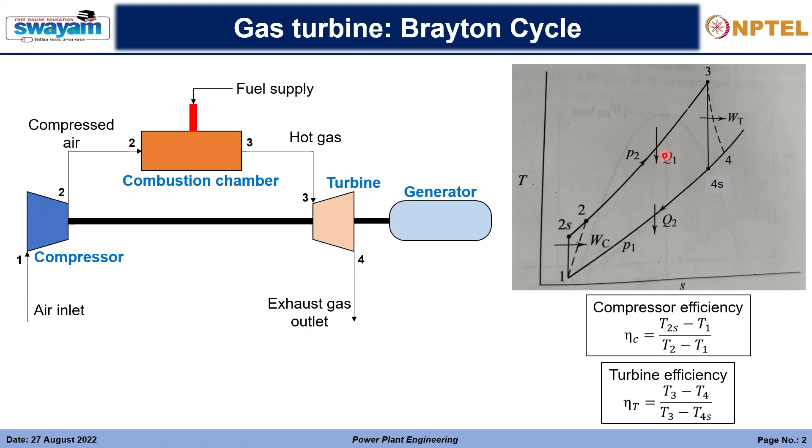First, since the process here is adiabatic, we will have to consider the temperature and pressure relations. T3 divided by T4s is an isentropic, reversible adiabatic process, and T2s and T1 is also isentropic. These are related by the equation P2 by P1 to the power gamma minus 1 by gamma, where Rp is the pressure ratio, the highest pressure by lowest pressure.

Then the work done is basically external work, given by this equation, which you might have read about in thermodynamics courses.

Then I wish to talk about how we are getting this work done. One of the most interesting things here is that PV can be converted into MRT, T1 minus T2, giving us a particular relation: gamma R divided by gamma minus 1, which basically represents the specific heat capacity at constant pressure, Cp. Although this formula is generally applied in 1 to 2 or 3 to 4, these are not constant pressure processes, but yet we get a term like this, so we can use this Cp term at the inlet conditions to calculate the work done in each case. Normally we cannot use it since pressure changes and Cp changes with pressure, but since we are getting a term Cp while deriving, we will consider it.

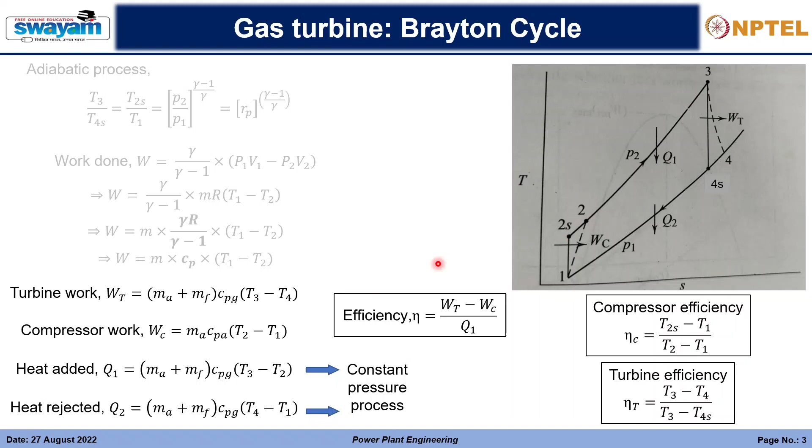So this was about the process and analysis of the Brayton cycle. Now let us solve one problem. This problem I have taken from the book Power Plant Engineering by P.K. Nag, and this problem actually talks about intercooling.

Now what exactly is intercooling? Also regeneration - I will briefly tell you about this. So intercooling means there are two compressors. There can be 2, 3, 4 compressors also.

Between each compressor, the temperature of the outlet of the compressor is cooled down to this lower temperature. Although the pressure is rising at the compressor, with pressure the temperature is also rising. So the temperature is then cooled down at the same pressure. Again, this next compressor rises the pressure from a lower temperature to that particular temperature.

So you can see from this TS graph, it will be better here. From 1, the inlet to compressor 1, 1 to 2 it is going, and then it is being cooled down from 2 to 3 in a constant pressure process. Then it again enters compressor 2 at point 3, after cooling. Then the pressure is risen again, but you can see the temperature rise is almost constant. For perfect intercooling, these temperatures - 2s and 4s, and 4 and 2 - will be almost constant, exactly constant.

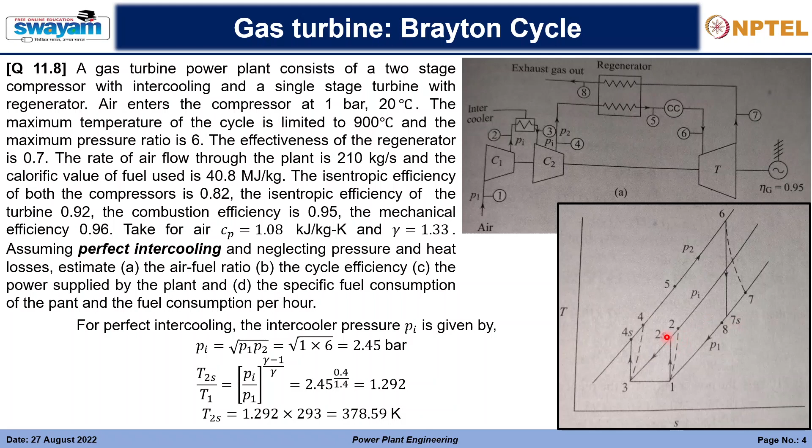But since it is not isentropic, we'll have to consider the efficiency of the compressor. The efficiency of compressor is defined as T2s minus T1 divided by T2 minus T1 — this was the least amount of work that was supplied to the compressor, but instead it is taking a higher amount of work, T2 minus T1. That is how the efficiency is defined, and utilizing this formula we will get the temperature value of T2 as 397.38.

So T2 we have found out, but since it is perfect intercooling, T2 and the compressor efficiencies are constant, so the same will apply down here also, and we will find that T2 and T4 will be constant.

It is almost constant, you can see here also. I just want to explain, I have shown here also. So for P2 and P1, I have considered the same thing.

T4s I have got as 378.74, and utilizing the compressor efficiency I have got 397.32 Kelvin. So it is almost close, that can be considered almost equal, right? So T2 and T4 are almost equal.

Then we have got T2, T4, okay. Then we will calculate T6, which we know, and T7 we need to know. So T6 to T7, this is an adiabatic process.

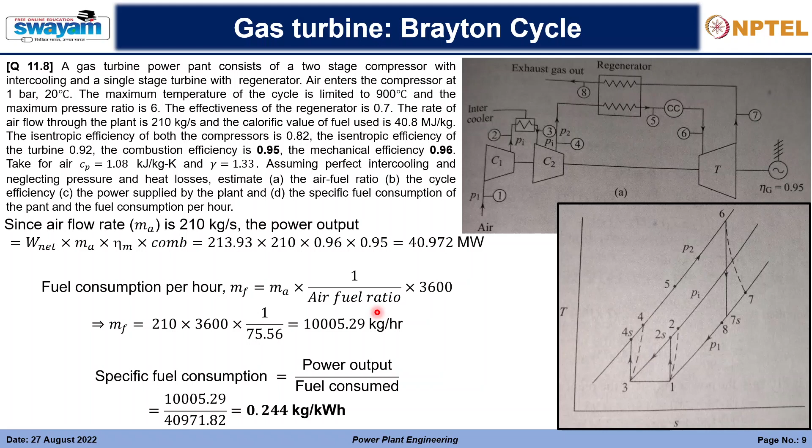Now as the next topic, I want to talk about the Pelton wheel. So let us quickly move on, we do not have much time.

So this is how the Pelton wheel looks, and it is a tangential flow hydroelectric turbine. Hydroelectric means there is no steam impinging upon the turbine blades, but rather it is water having very high kinetic energy that is impinged upon the turbine blades like this.

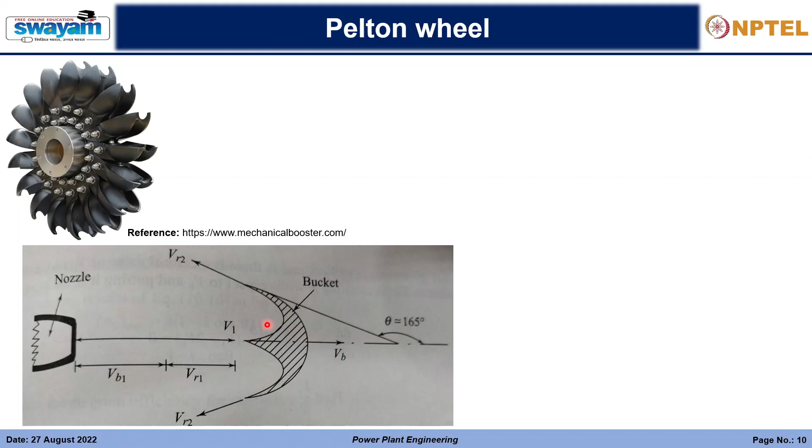These are the blades you can see, and they have this particular shape. There is a section dividing the two sides, and there is a particular reason for this division: it splits the jet. The jet directly impinges upon the center and splits in both directions.

By splitting the jet, a symmetric velocity diagram is created from both sides - the velocity here and the velocity coming out there will be the same. This cancels out the axial velocity, meaning the velocity of the jet in the upward direction and again in the bottom direction will be equal and opposite, so it cancels out the axial velocity components.

Now, if I supply this jet in the tangential direction, the water will move out in this direction and in this direction, along this shaft, this longitudinal direction. So if there is any velocity component in the shaft's longitudinal direction, it will impart a particular thrust on the shaft.

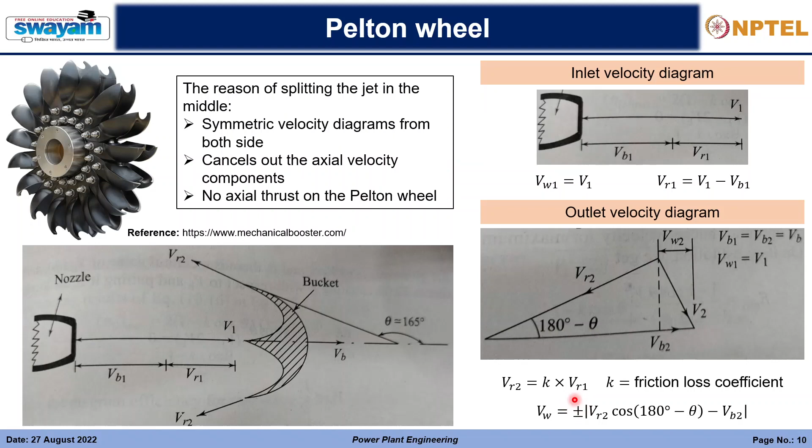Moving forward, if we calculate the total work done on the wheel, how can we calculate it? By calculating the change in momentum. This change in momentum is m, but m is not in kg, it is kg per second. So change in momentum with respect to time, that is the work done.

This is m times v1 minus [k vr1 cos(180 minus theta) minus vb]. Since the blade's whirl component here is directed, suppose we assume it is directed in the opposite direction of v1, we'll have to put a minus sign, so the total effect will be positive, and this is the total work done here.

Then the hydraulic efficiency can be calculated in this manner. Somewhere I'm missing a vb here. This is the force, and the work done is the whole thing multiplied by the blade velocity. Force into velocity gives us power, force into distance divided by time. So we'll multiply this whole expression with the blade velocity, and that will give us the work done on the wheel. The work done divided by the kinetic energy, which is half m v1 squared, the kinetic energy of the inlet jet, will give us the hydraulic efficiency.

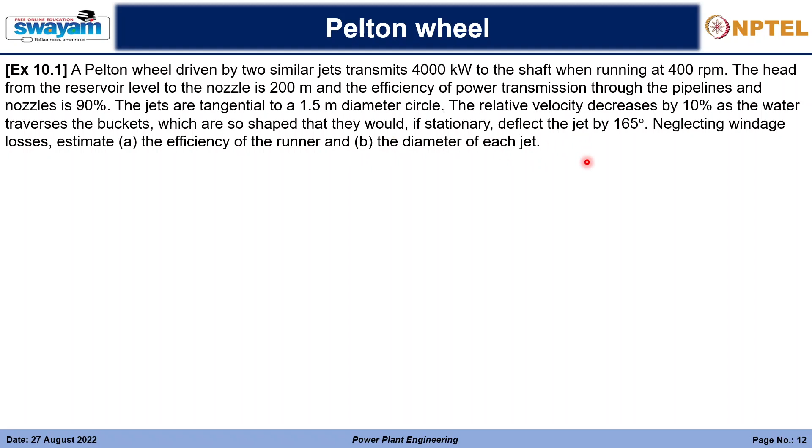So first of all, what we can do mechanically is calculate, from the head that is given, the velocity of the fluid at the inlet to the bucket. So normally in the formula you will see this is 2gh.

Theoretically, if I equate kinetic energy to potential energy, it gives us the velocity at the outlet to be root 2gh, and somewhere you can see the velocity of the jet leaving the nozzle is being multiplied by cv outside the square root, meaning cv applied to the theoretical value. But now I am multiplying it inside the square root sign.

Why am I doing this? Because the total head that I am receiving, that is the mgh potential head, is not being completely utilized — there are some losses. So the amount of power transmitted is only 90%. 10% is being lost on the head itself, not the velocity coming out of the nozzle — only on the head it is 10% loss. So I will have to deduct the loss inside the square root here.

So this is how the velocity of fluid at inlet to the bucket is calculated. We have no loss at the nozzle, rather we have loss at the transmission, so that is why we calculate like this. Then the velocity of blades — the RPM is given, the diameter of the wheel is given, so accordingly we can calculate the velocity of the blades.

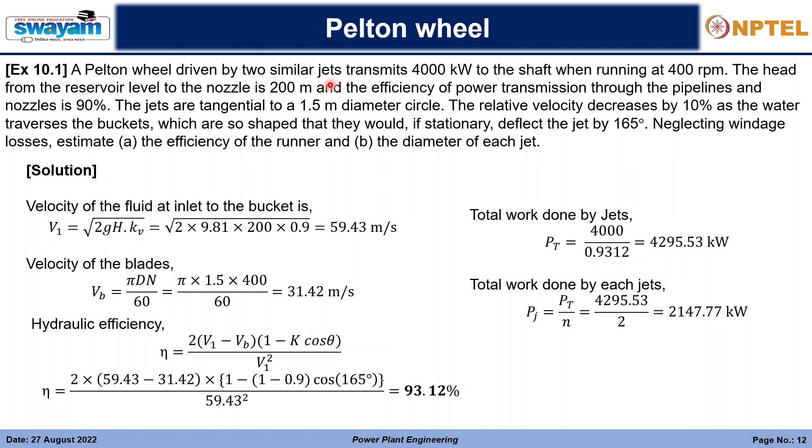Since we have two jets — two similar jets driving the wheel — we divide the whole power by 2, and that gives each jet a kinetic energy of this much power.

Then we do an energy balance such that from each jet's kinetic energy, we can calculate by this formula the velocity of the jet leaving the nozzle. If the velocity is known, we can calculate the diameter of the nozzle required. By this we get the diameter of the nozzle as 0.1614 meter. So this is how the energy balance is done, and from this we calculate the diameter.

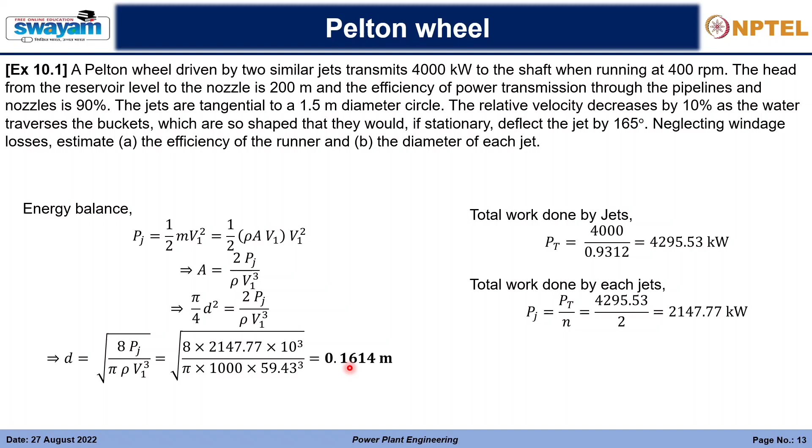Let us now work on a similar problem, which specifically illustrates the designing of the Pelton wheel.

We have some targets to reach: power to be developed is 6000 kilowatt, net head available is 300, RPM needed is 550, ratio of jet diameter to wheel diameter is 0.1, hydraulic efficiency is 0.85, and coefficient of velocity speed ratio are given.

So if we know all these quantities, can we determine all these parameters that are further needed? Can we design the Pelton wheel? Let us see.

First we need the velocities. We have the head, and from the head we can get the final exiting velocity from the nozzle. We have the velocity coefficient, since in the nozzle there will be some losses, and according to the losses you multiply a factor to the theoretical value. So that is 0.98 times the theoretical value, giving 75.19 meter per second. This is the inlet velocity from the nozzle.

Then the blade velocity is given by the speed ratio times v1, which gives 35.29 meter per second. If we know all these values, we can directly calculate the quantity of water required.

We know the overall efficiency. Since there are no transmission losses anywhere, we can directly consider this. The overall efficiency is 0.85, given by this formula. This leaves only one unknown, the discharge rate, and it evaluates to 2.4 meter cube per second. So this way we can calculate the quantity of water required.

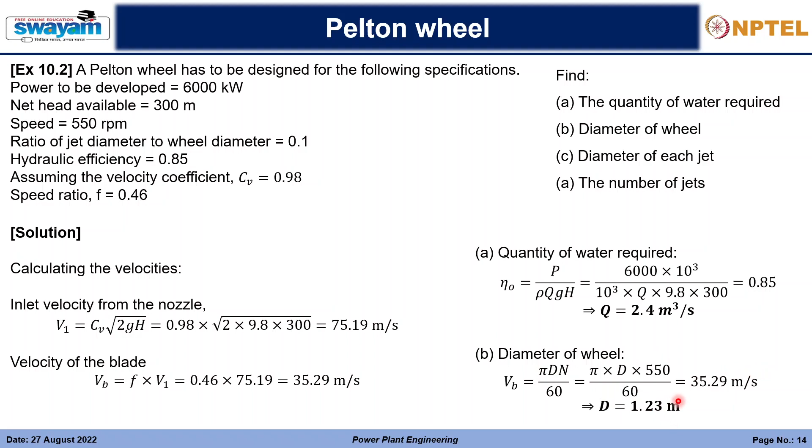Next, diameter of each jet. We are given the jet diameter to wheel diameter ratio. Now that we know the wheel diameter, the jet diameter will be 0.1 of that, which is 0.123 meter.

Next, number of jets. The total quantity of water required, Q, evaluated to 2.4, we divide by the amount of water supplied from each jet. By that we find we need at least 3 jets to supply this amount of water. This is how we can design a Pelton wheel and its various parameters.

This is how we can control the amount of power to be developed. So this was a question regarding that.

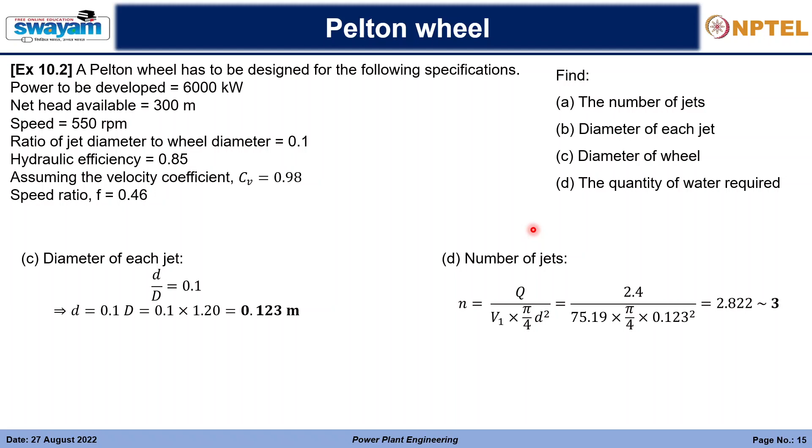Now I want to discuss a very important thing, that is specific speed. Specific speed is basically defined as the speed of a geometrically similar turbine which produces 1 kilowatt power under 1 meter head. Suppose we have a very big turbine with a very big head.

We cannot directly experiment on that, right? We can experiment on a smaller scale, so we have to scale down the whole thing. Geometrically everything is the same, but we scale down in order to analyze it. We cannot directly go and do experiments on very big actual turbines and dams.

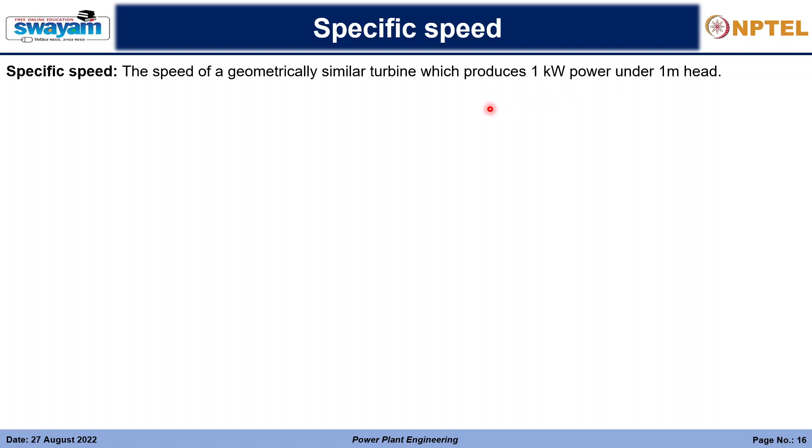That is why specific speed is a very important parameter that needs to be understood properly. Suppose we consider the whole turbine: a geometrically similar turbine which produces 1 kilowatt power under 1 meter head, while an actual turbine produces some P amount of power under some H amount of head. What is the relation between the RPMs that each of the turbines will be having? That is what we need to understand. That is the specific speed.

First I wish to derive it in front of you, since it is very hard to get this derivation.

The overall efficiency is the shaft power divided by net power supplied. The net power supplied is basically rho Q g H, that is the head being supplied against the turbine. So the power is directly proportional to Q and H. Now we know that the power is directly proportional to Q and H, but we need to eliminate these properties. We need to have only speed, power and head, and eliminate all other properties. Only then can we compare.

So we'll have to do it step by step. First we'll consider the tangential velocity and jet velocity. The blade velocity is F into V1, so it is directly proportional to V1, the jet velocity.

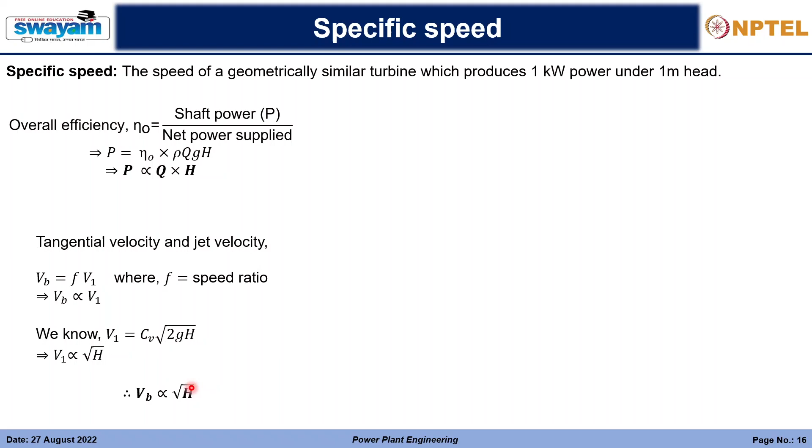And jet velocity, we know it is proportional to root over H by this particular formula. Hence the blade velocity is also proportional to root over H by this relation. Now we know the blade velocity is directly proportional to root over H, but how is it related with the diameter and the speed? It is related by this formula, directly proportional to the product of diameter and speed. Hence the product of diameter and speed is directly proportional to root over H, and also proportional to D into N.

So this is also legit. Then by this formula D is directly proportional to root over H by N. So diameter is now in terms of head and speed, so that is good. We have eliminated the diameter, at least.

Then we'll eliminate the rate of discharge in terms of H and N. Rate of discharge is given by area into V1, that is jet velocity. So area is basically the width of the blade into the diameter. Accordingly we get that geometrically, if it is similar, B, A and D are having a particular ratio. B is directly proportional to D.

This ratio needs to be maintained in the actual turbine also, the turbine that we need to scale down. So this geometrically similar concept should be applicable in both, and this ratio should be constant.

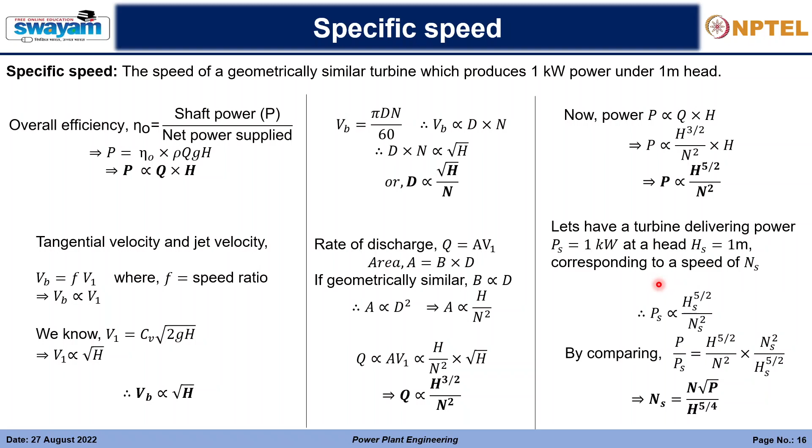So this is a very important property to reduce the scale of an actual turbine to a very small turbine delivering only 1 kilowatt power at a head of 1 meter, corresponding to this specific speed. So this scaled down turbine will have the specific speed NS. By this we can correlate both cases.

So let us now quickly go through an example which utilizes this concept. A single jet impulse turbine of 10 megawatt capacity is to work under a head of 500 meters. Head is given, capacity is given. If the specific speed of the turbine is 10, NS is given as 10, overall efficiency is 80%, coefficient of velocity is given, find the diameters of the jet and the bucket wheel.

So we need to find the jet diameter and the bucket wheel diameter. Assume the speed of the bucket wheel as 0.46 of the velocity of jet. So how can we start it?

First we know the specific speed, and accordingly we will get the speed of the actual turbine which is delivering this particular power. So by this we can get 236.4 rpm.

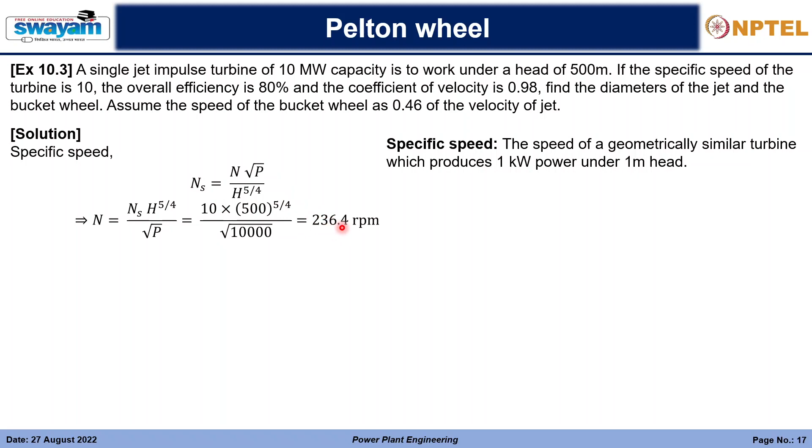Then we calculate the velocity of jet, so that is 97.06 meter per second. We assume that the speed of the bucket wheel is 0.46 of the velocity of jet, so we directly multiply 0.46 into 97.06, rather than multiplying 0.46 to this whole theoretical value. So that is leaving us 44.65 meter per second.

Then using this formula we will finally calculate the diameter of the wheel, the Pelton wheel. Then we need to calculate the jet diameter.

From overall efficiency we know all the parameters except the rate of discharge, so rate of discharge we can calculate from here. But we know that is equal to pi by 4 d square, that is the area of the jet into the velocity of exiting the jet. So if we equate it, we will get diameter of jet as 0.183 meter.

So this is how the questions are framed. The specific speed is given, and according to that it can be scaled up to any particular turbine having geometrical similarities. So this is how it is being framed.

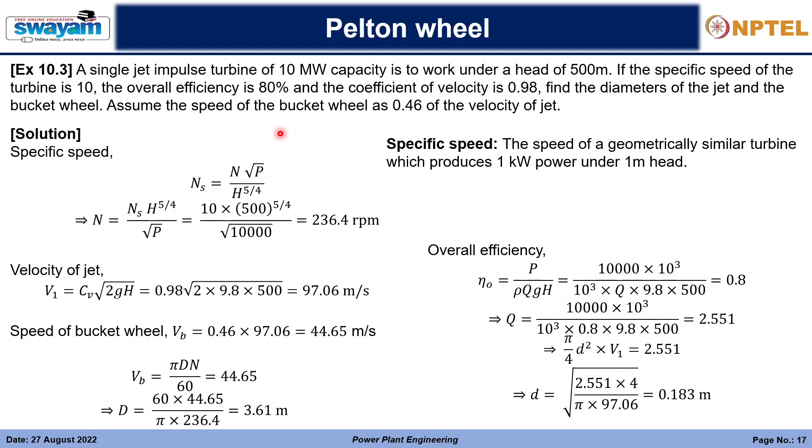And I have one more question for you, but maybe I can quickly go through it.

It is just a derivation to show that the specific speed of a single jet Pelton wheel is about 202 times the diameter ratio, the diameter ratio of jet diameter by wheel diameter. The Cv, F and H parameters are given, by which we will get this 202.

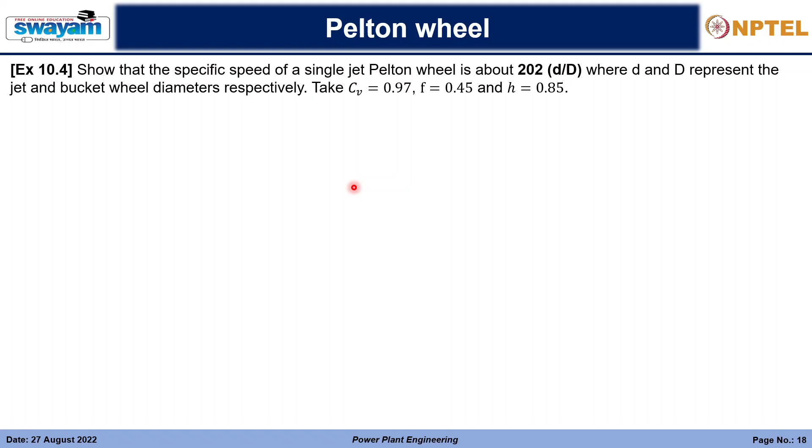So the specific speed we need to calculate. First I will just quickly go through the solution as we are running out of time. We will quickly calculate the rate of discharge by this particular formula, where n is the number of jets, this is the area, this is the velocity of exiting the jets.

Then we calculate the power supplied by the water stored in the dam. The water stored in the dam exactly gives us this amount of power, but due to the overall efficiency it gets reduced, hence we'll have to consider this. So finally we keep the equation of Q in here, and P we take in kilowatt. So this is the final expression of the power.

Then we calculate the peripheral velocity VB of the Pelton wheel of diameter D, and finally get the RPM at which the bucket is moving. So that is based upon this ratio of speed ratio and the head, total head.

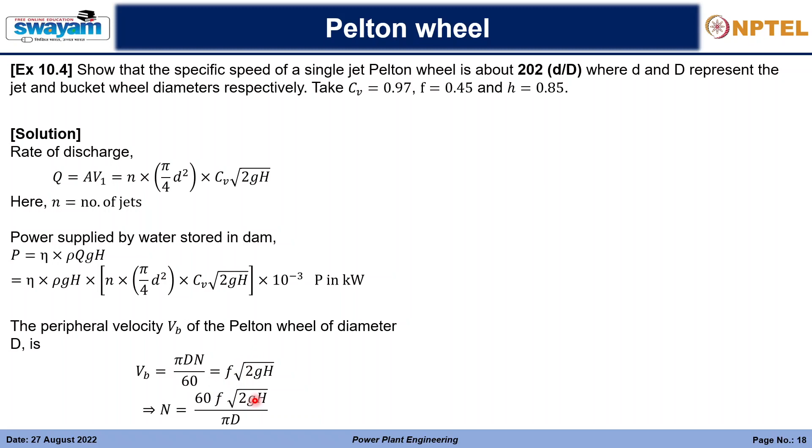Finally we put these equations, the power supply and the head, also the RPM, into this specific speed equation, and this is the whole big equation that we can get. Finally we substitute the values F, Cv and H that we are already given here, and we will find that Ns is equal to 202 into root n into d by capital D.

Now n was the number of jets, so for a single jet turbine n equals to 1, so the specific speed is given by 202 times this diameter ratio. So this was a derivation type of question. By this I have completed the Pelton wheel, till Pelton wheel.

Next class maybe I will cover the Francis and the Kaplan turbine, and that was all for today. So is there any question?

Yes. So here you mean?